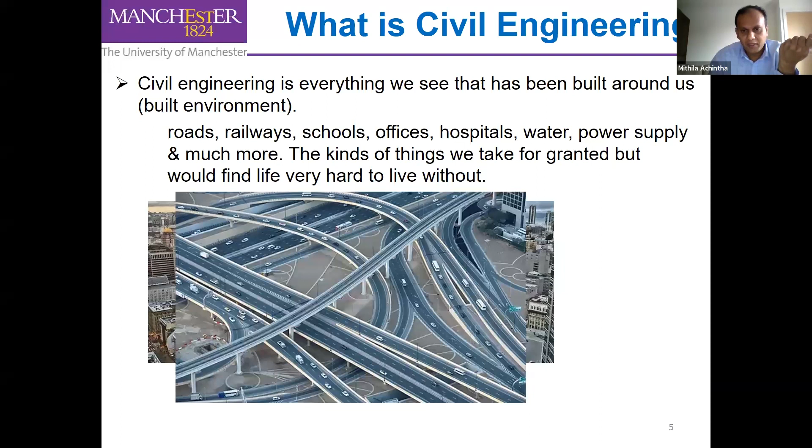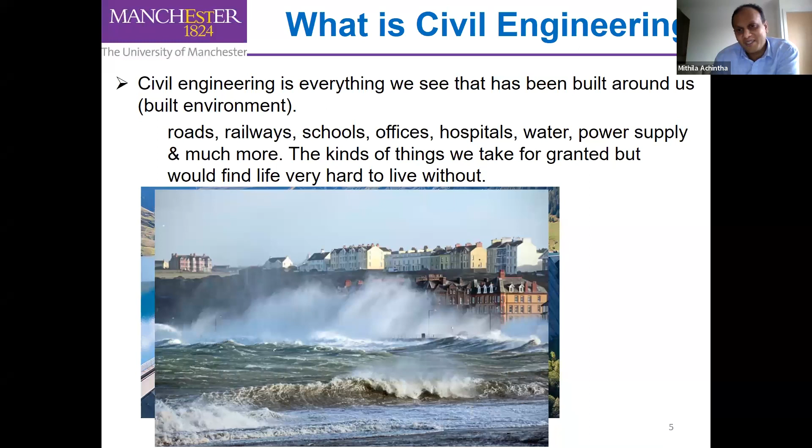So it can be buildings, road networks, tunnel construction for rail infrastructure, water dams and various stuff. And not only new construction or new structures, this is like protection - coastal protection, again really important. So civil engineers are the ones who would save the world. We have a major role. I will go through the details later. And then water supply and also wastewater treatment, etc.

So probably, as far as I'm concerned, this gives a wrong picture. Civil engineers are not just supervising a construction project. Civil engineers do a lot more. This is one of the jobs, but it's not all. Civil engineers do more interesting work.

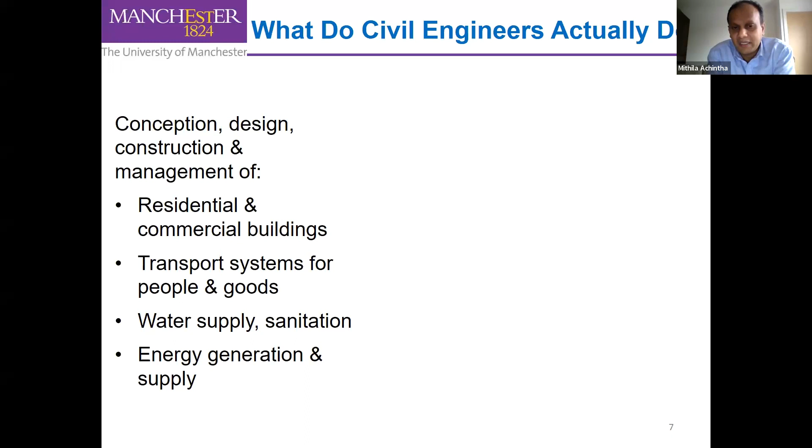So what do civil engineers do? We are the ones who design, create, manage everything - residential, commercial buildings, transport systems, even traffic signaling systems, water supply, sanitation, energy generation. I'm aware that now civil engineers increasingly work in renewable energy like nuclear power plants, offshore power plants. So it's very, very wide and very diverse.

In short, we are not just supervising construction projects. What we do is design, create, and connect the world around us.

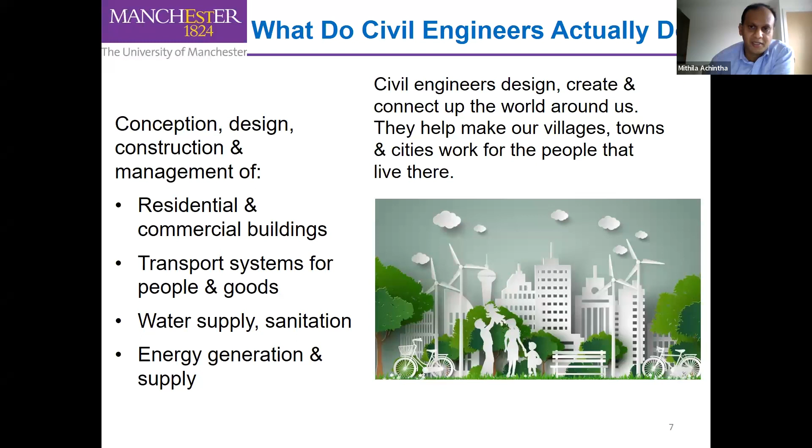Now let's move into the challenges. I think this is probably the main part of the talk in terms of sustainable development goals. I believe some of you, if not all, are familiar with these sustainable development goals set by the United Nations. Actually, civil engineers have a very key role in achieving these sustainable development goals.

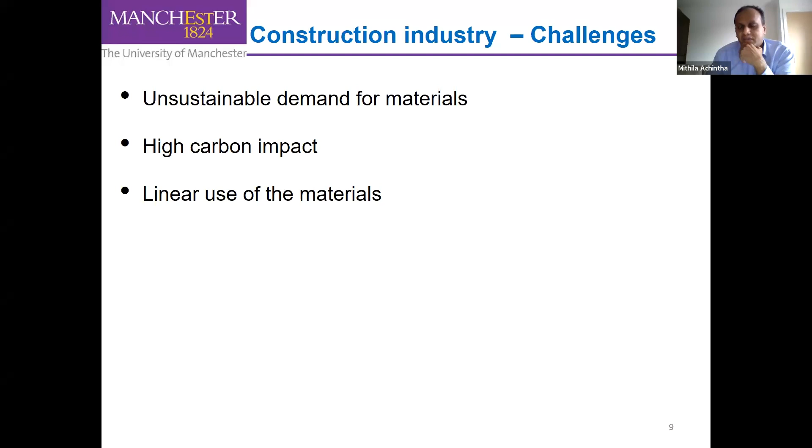And another main issue, which I'll discuss in detail in a few minutes, is something we call linear use of the materials. So these are the main challenges: unsustainable demand for materials, materials with very high carbon impact, and linear use of materials. In the next few slides, I will go through these in detail.

Okay, probably you can see these numbers here - how much materials are used in the construction industry all over the world. For example, 4 billion tons of cement, 10 billion tons of concrete, imagine. The world population is around 8 billion people at the moment, which means on average, one person uses more than 1 ton of concrete. It's a huge amount of material.

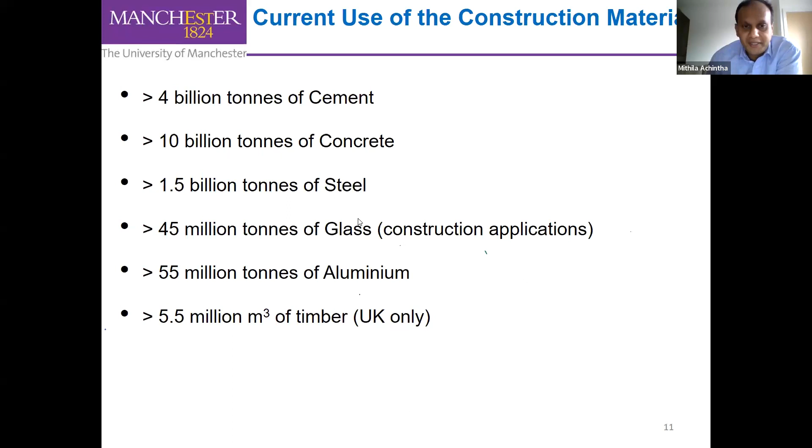Actually, concrete is the most widely used human-made material, second only to water. I mean, water is not a human-made material, so that amount of material - and then other materials like steel, glass, aluminium, timber. So we need a lot of materials. Okay, so that's a problem.

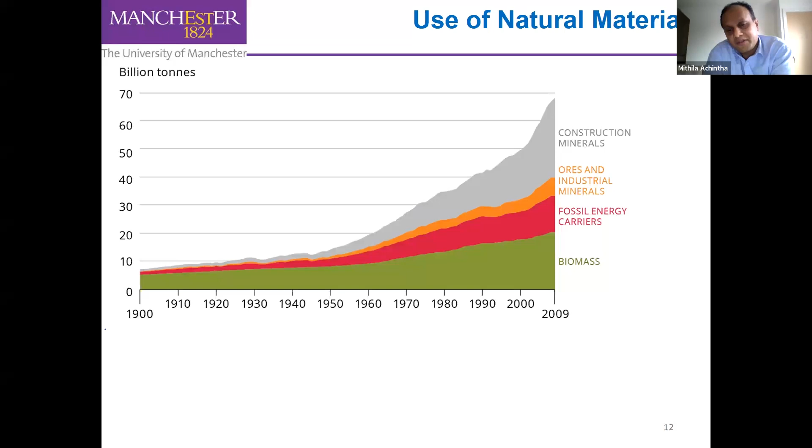And as I said previously, most of these construction materials like cement and glass are manufactured using raw natural materials. On this graph, you can see this gray color thing, which is the effect of construction minerals - the natural materials we need to produce construction materials. This is nearly 40% of all materials. Out of all materials we use in our world, more than 40% is due to construction related activity. So you can see how significant the influence is.

For example, in 2011 they estimated that people used 35,000 million tons of raw materials - sand, clay, calcium carbonate sources, etc. And if we continue this trend, because there's more and more infrastructure, more and more projects, they estimated that by 2060, if we continue, we might need 80,000 million tons of natural materials.

The problem here is our demand is increasing, but the supply will not increase. We won't get more and more aggregate, or more and more sand, clay, etc. So materials will not grow that fast, at a faster rate, compared to how demand increases. That's the problem. That's why I'm saying at the moment our construction industry is not sustainable, because demand increases at a rate higher than what nature can supply.

Okay, so we definitely need to do something here, which means reduce the demand. We must reduce the demand, so we have to be clever. We can't continue how people used to build things 60 years ago, because back then people did not consider these things in greater detail since materials were available. But now, unfortunately, we can't do that. So that's the sustainability issue.

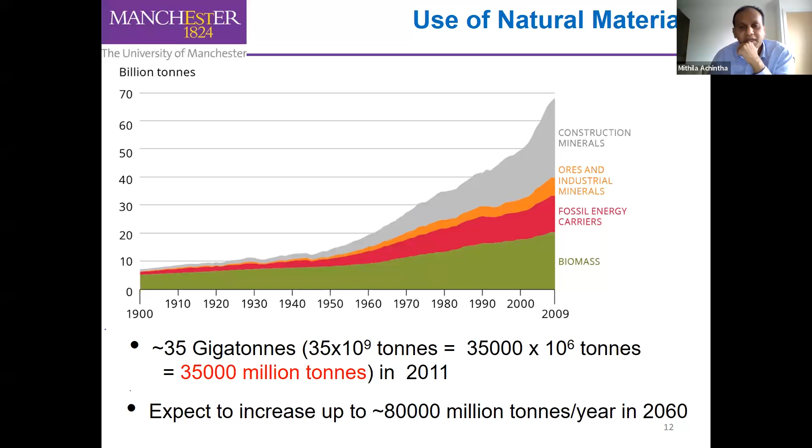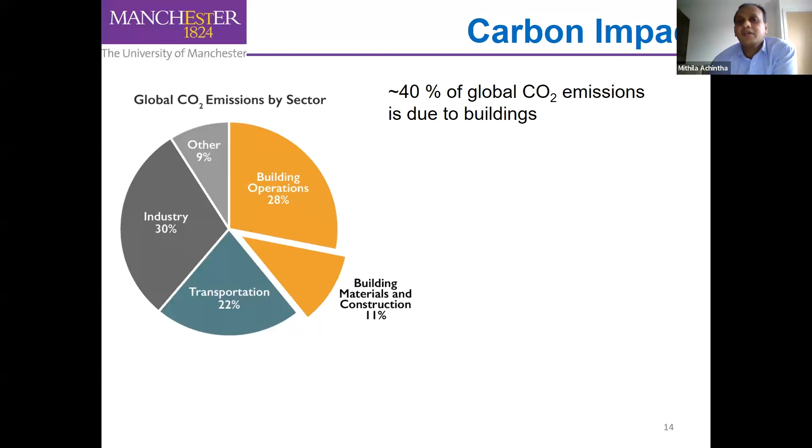We use a lot of energy to run or function our buildings, which includes residential buildings as well as commercial buildings, hospitals, schools, everything. So it's 40%, which is huge.

Significant influence. And even here, for example, transportation shows 22%. Some of these transportation emissions are due to construction related emissions, because you need to transport materials from manufacturers to construction sites, and then construction needs heavy machinery - cranes, trucks, all these things.

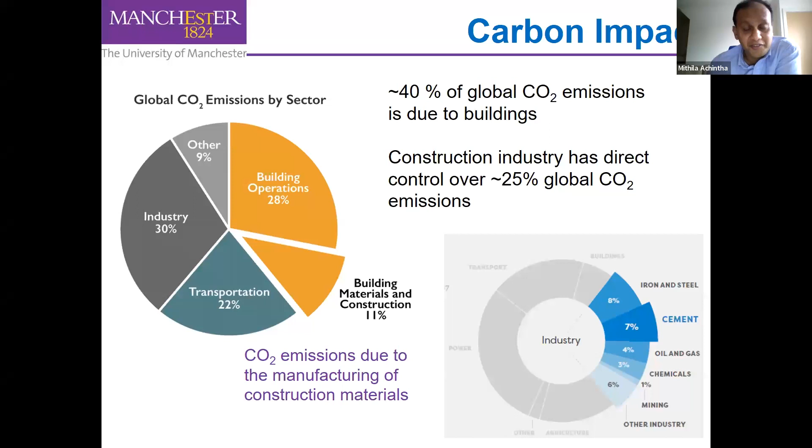Cement manufacturing - so definitely we need to reduce the demand for cement and reduce the demand for concrete, for example. So that's the carbon challenge.

So I said there are three challenges. One is the sustainability challenge, I explained already. The second challenge is the carbon challenge. And the third one, I want to highlight linear consumption of the material.

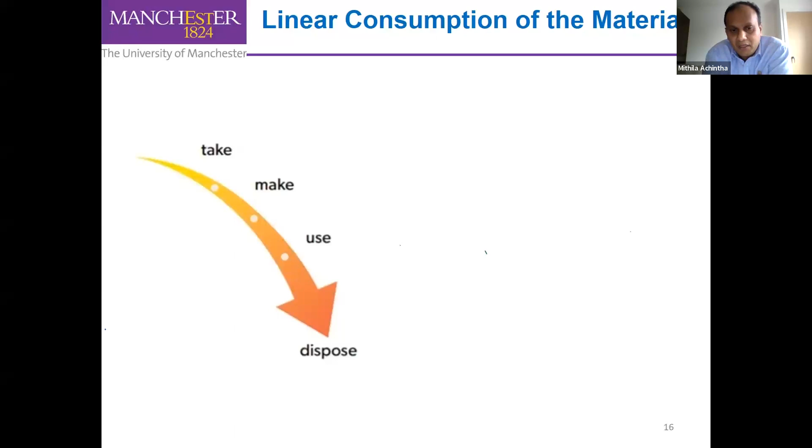So what that means - we usually extract materials. We use raw materials, natural materials like sand, clay to make construction materials. And then we make what we want, like glass, cement. And then we construct our structures, buildings, etc.

So what happens after the use of the building? I'm pretty sure you have seen this type of places wherever you live - you just dump construction waste into a landfill or a site where you can dump these things. So we are not closing this loop.

What we need is circular economy. Circular economy, we need to close this loop. At the moment, it's linear. So we need to close the loop, which means we need to either reuse or recycle.

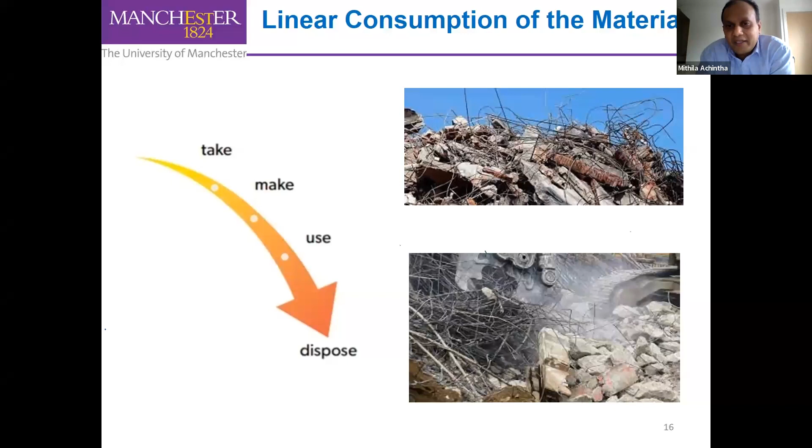That's again really important - when we construct structures or when we design structures, we need to think about end of life. We can't just throw the concrete or steel into a landfill because it's not sustainable, obviously.

Okay, I don't want to go through these details. Then the solution - so those are the problems, and what are the solutions? So these solutions are based on some of the research carried out, research areas I am involved with.

For example, I'm very interested in low carbon and sustainable construction - how we make our material, our constructions contribute to a less carbon footprint, and also how our structures or constructions are sustainable.

Obviously, what we can do - I will discuss based on my 3 previously identified key areas. Unsustainable demand for materials - that's the first issue I discussed. How we can solve it - we need to be very careful, or we need to be innovative.

We can use less material. So if you remember that slide, I mentioned 4 billion tons of cement, 10 billion tons of concrete - can we make it less? Less amount per year, not only in one country.

So I'm not focusing on the UK or wherever you are - it's not just UK, we need to make sure we apply these things all over the world. So we need to use less material, and we need to use material efficiently.

We need to use materials more efficiently, and we need to make sure these materials have better technical and durability performance - which means they are stronger, better, and last longer, so you need less maintenance.

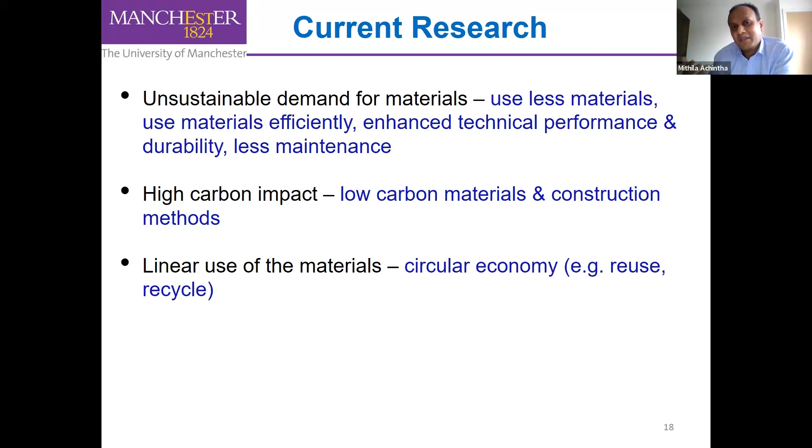You can't think about recycling or reusing once everything is done, because there is no opportunity to do that. So you need to think about this from the very beginning.

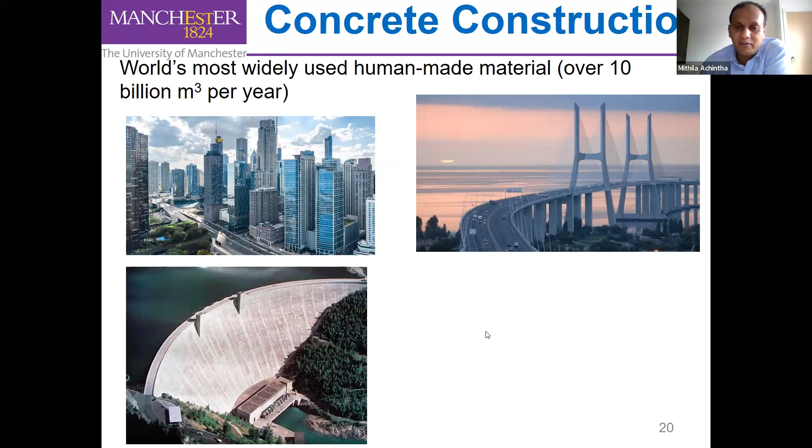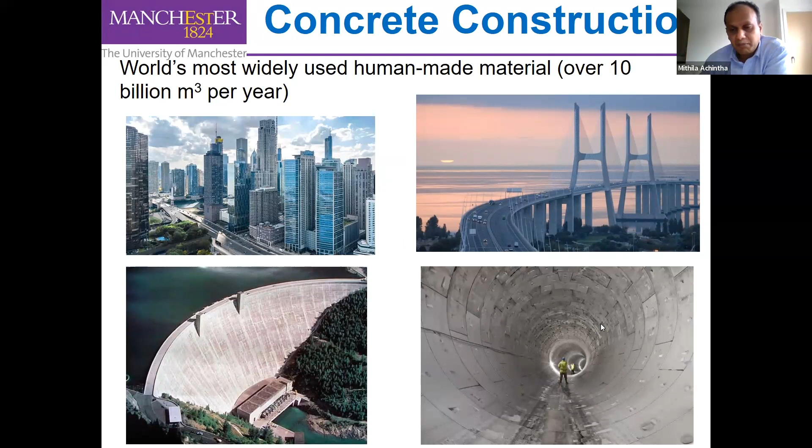For example, concrete and cement are among the most significant materials in terms of carbon impact, because concrete is everywhere, in every structure. It's a wonderful material, simple, and durable. Anyone can make it, everywhere you can do it. But the carbon impact is really, really high because of the volume, and also because we have less reuse or recycling. Those are the two reasons.

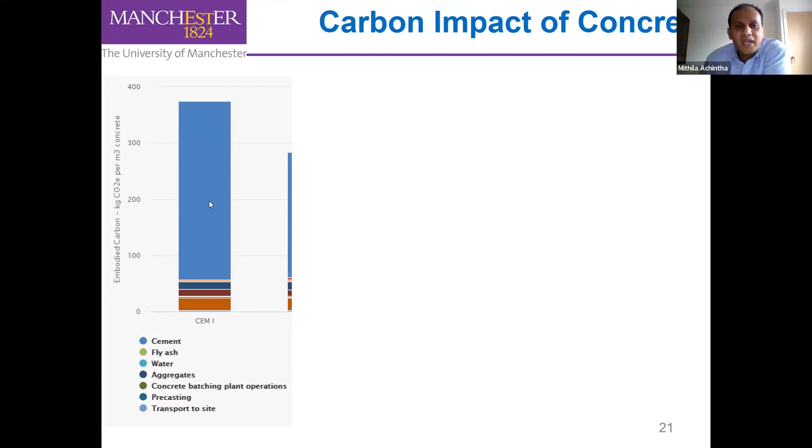So what can we do? I think this diagram makes it clear. It shows if you take a meter cube of concrete, how much carbon is in there based on different materials. Don't worry about the other things, those are small quantities. This blue one on top, that's cement.

More than 80% of carbon in concrete is due to cement, which means we need to reduce the amount of cement, or find other materials we can use. I do a lot of research in this area, a number of waste materials, byproducts from other industries, have cementitious characteristics. We need to study these in detail, their chemistry, because structures need to be designed for 100 years, not just 1 or 2 years.

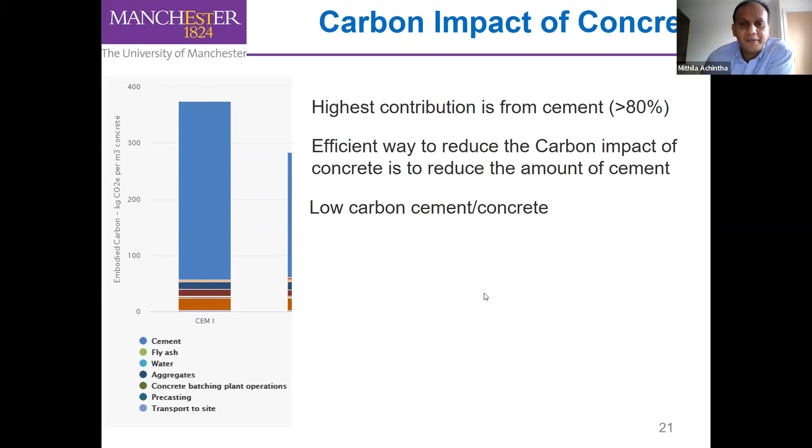So we need to do a lot of serious research on how we could use alternative cementitious materials. As I said, this light blue area is 80% of the total carbon impact coming from cement. So if you reduce the amount of cement, obviously we can make concrete less carbon, or cement less carbon. Clear? And then we can think about new materials.

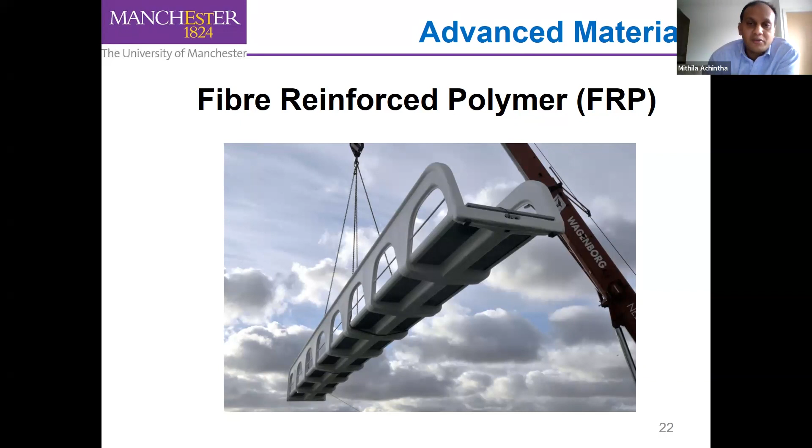You've probably come across materials called fiber reinforced polymer, FRP, or carbon fiber reinforced polymer, CFRP, used in other industries like aerospace and automobile industries, because they have superior strength, are lightweight, and durable. So we can think about using more advanced materials, new materials, to make sure our structures are sustainable and low carbon.

Okay, so those are material carbon. If you remember, I mentioned building operation, or running buildings. When we live in a building, we need heating, lighting, all these things, which consume a lot of energy and have a high carbon footprint. Can we think about reducing the operational energy, operational carbon? We can make buildings more energy efficient.

One way of doing this is glass. If you compare modern buildings, they use a lot of glass compared to old buildings, whether brickwork, concrete, or steel, especially in the facade, non-structural areas. We can use a lot of glass because it allows daylight, and we can use solar heating systems, even solar panels, to generate energy from sunlight. Nowadays a lot of glass buildings, modern buildings, have a lot of glass.

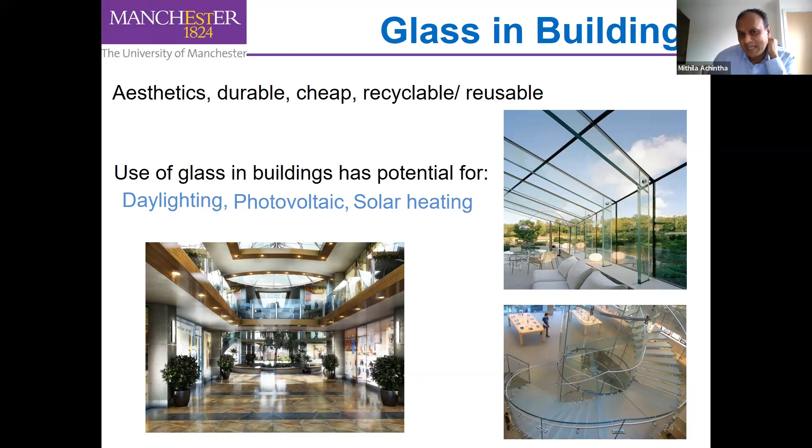That's fantastic. However, glass is a brittle material, meaning when it fails, it shatters into small pieces, and usually glass is the most fragile part of a building.

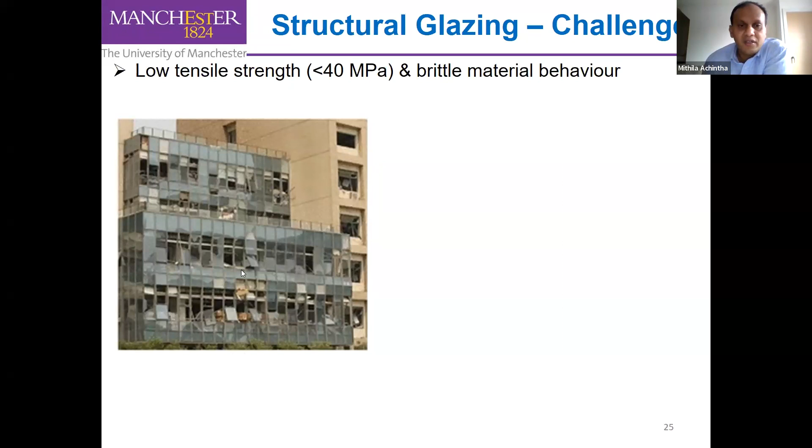This is from a real structural damage or structural failure, and you can see the glass windows have all fallen, whereas the main structure remains intact. This can cause serious injuries to people. This is something I saw in Manchester, unfortunately vandalism, at a bus stop. This is a photo I took while walking, it's completely shattered. So this is vandalism. Glass fails like this, not like steel or concrete.

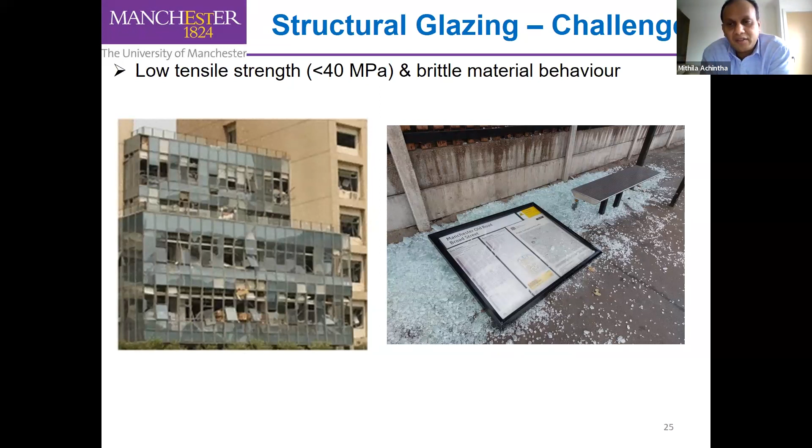But however, the use of glass is fantastic, as it can enhance the energy efficiency of the building. However, it's low strength and brittle, meaning it shatters into small pieces. So what we developed is a type of laminated glass, because we can't change glass itself, since transparency is the key factor of glass.

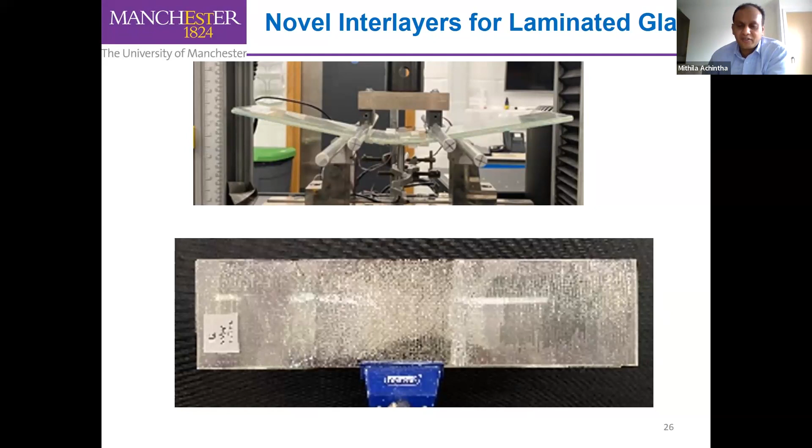I don't have time to show all these things, but I want to highlight one more key thing. This is a challenge when you start as civil engineers. When it comes to construction projects, there are key parameters. We think about cost, obviously, because whether it's a government project, an individual project, or a company project, cost is really important, so cost is one criteria.

And then also we need to make sure structural viability, meaning they are strong and durable. Unlike other things like cars, mobile phones, or computers, we don't want to use buildings for just a short time. But buildings, structures, infrastructure projects, bridges, we want them to last more than 100 years, so durability is really important.

So traditionally, at the moment, designs are based on cost, structural viability, and durability. We don't want structures to collapse. But I think in the near future, very soon, designers must consider carbon. Not only cost, structural viability, and durability, but the carbon impact is also important. That's why I mentioned in my previous research that low carbon is key.

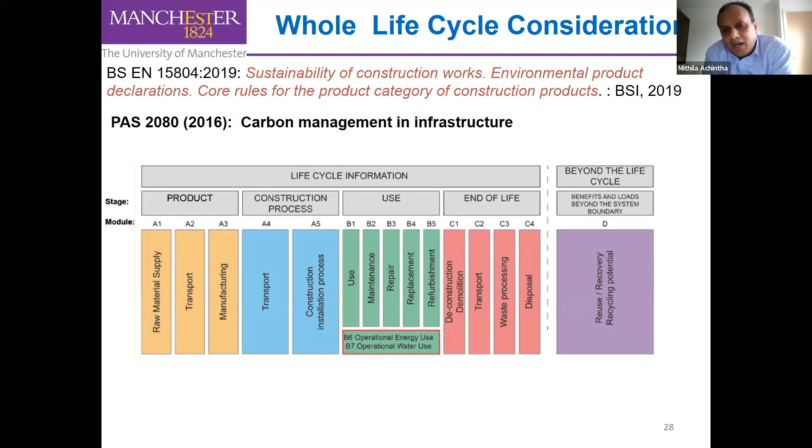Okay, just to summarize, I already mentioned the challenges. So what are the simple things we could do as civil engineers? We need to improve our material efficiency, use better materials in better ways, and avoid over design - we don't need to over design our structures.

And then number 3 is circular economy, which means we try to reuse or extend the lifetime of structures, and use low carbon materials. I mentioned low carbon cement, low carbon concrete, and we need durable materials, things like fiber reinforced polymer.

Also, this is important when it comes to carbon: if we can use local materials, that's really helpful, because otherwise you have to import materials from countries which are 4,000 or 5,000 miles away. That won't help, even if the materials are low carbon, because you need to consider transportation. That's why I said whole life consideration is really important, not just the material.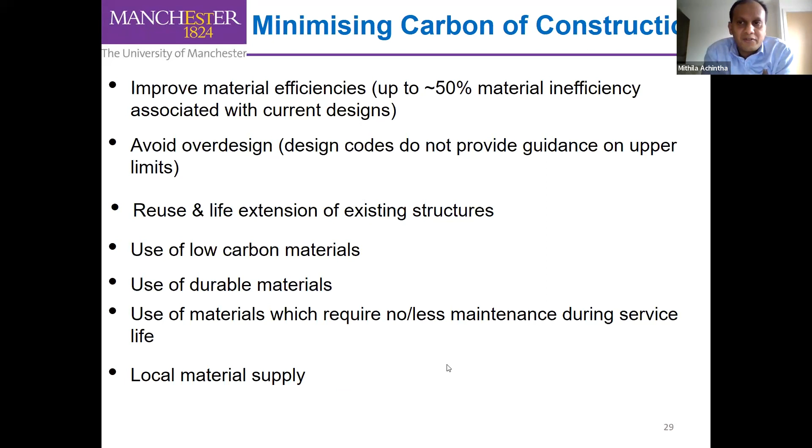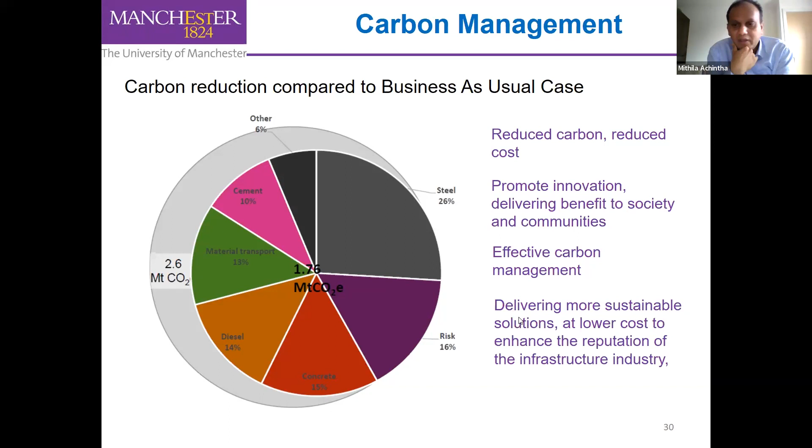This is one example I did. I can't provide much detail because it's a consultancy project I did for a major infrastructure project in the UK. This project is at its early stages, and the gray color was their original plan - the carbon footprint due to their original design. But now, with our consultancy advice, they managed to reduce it - the colorful one is the current design, and it's about 30% less carbon. So 30% less carbon, and they want to keep improving.

If you think, can we make this low carbon alone? Probably it's not going to work. So we need to make sure about the cost as well. For example, at the moment the construction industry has an economy of about 8 trillion US dollars. It's huge.

If we use less material, obviously that helps because material cost goes down. Also, when we use less material, structures become less heavy, so probably we don't need heavy machinery and that type of thing.

And I mentioned about local supply. That's really important, because if you use local materials, transportation cost and everything improves. As far as I'm concerned, all these low carbon things are really important, but we need to think about the cost as well, because if we do not consider cost implications, we will struggle to ensure people or society accept these solutions. So cost is really important as well.

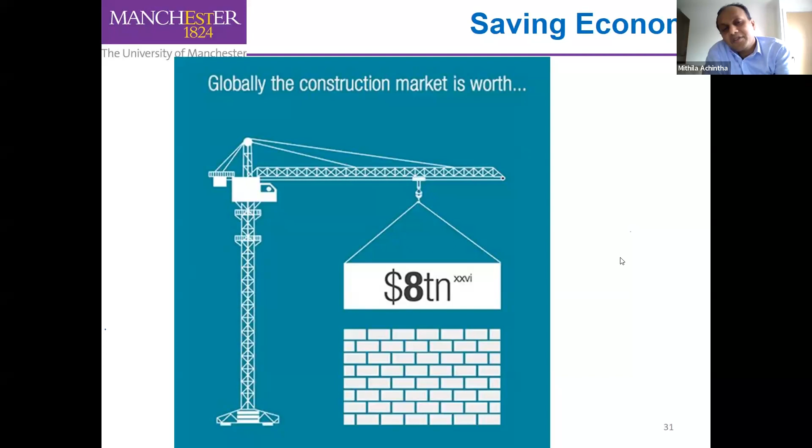That's about the main lecture. But since I'm the program director of civil engineering programs, I have a few slides to mention. We are part of the School of Engineering.

I know you are very good with maths and physics, perhaps, so that's why you are interested in engineering. What we make sure, at the university, is that you develop skills for solving real life problems, because it's not like solving mathematical problems, you are already very good at that. So real life problems involve those challenges: designing, analyzing, calculating, and being creative. And finally, you are applying science and maths to real life problems.

If you're on a 4-year program, you're learning about probably 60 course units, but we have 4 core themes: structures, materials, hydraulics, and geotechnics. So in every year, you learn some course units within those areas.

Recently, myself included, since I joined the university about 3 years ago, I included a lot on carbon calculation and sustainability into our curriculum. So 4 main core themes: structures, materials, geotechnics, hydraulics, plus project management and sustainability. In addition, you will learn team working, some practical skills, etc.

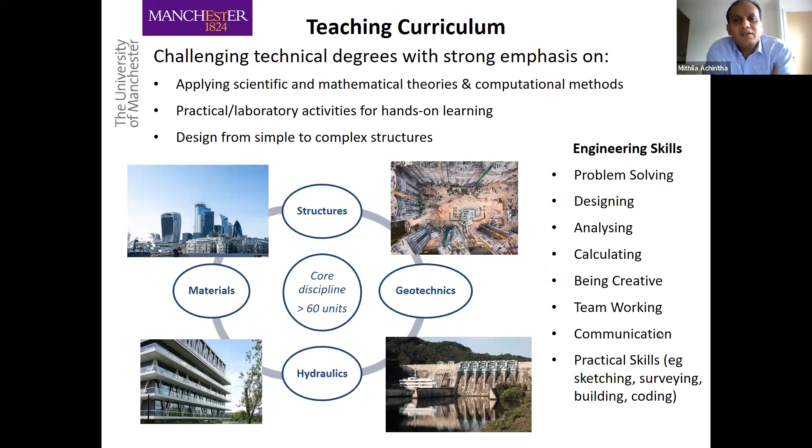We have different types of teaching. For example, specialized technical units like material structures, climate change, fire engineering towards the end of your course. And we have other things like individual projects, group projects, research projects, design projects, various types of projects, where you can practice teamwork and communication skills, which are really important for engineers.

You have various activities: field courses, lab classes, projects, research projects, design projects, individual projects, group projects, etc. There are a lot of things you can do at the university, and Manchester is a big city, so you can have a lot of fun as well.

Finally, the civil engineering industry is very wide. You can do various jobs: structural engineer, geotechnical engineer, transportation engineer, energy engineer, environmental engineer, construction manager later. Probably you can't be a manager just when you graduate, but a few years later.